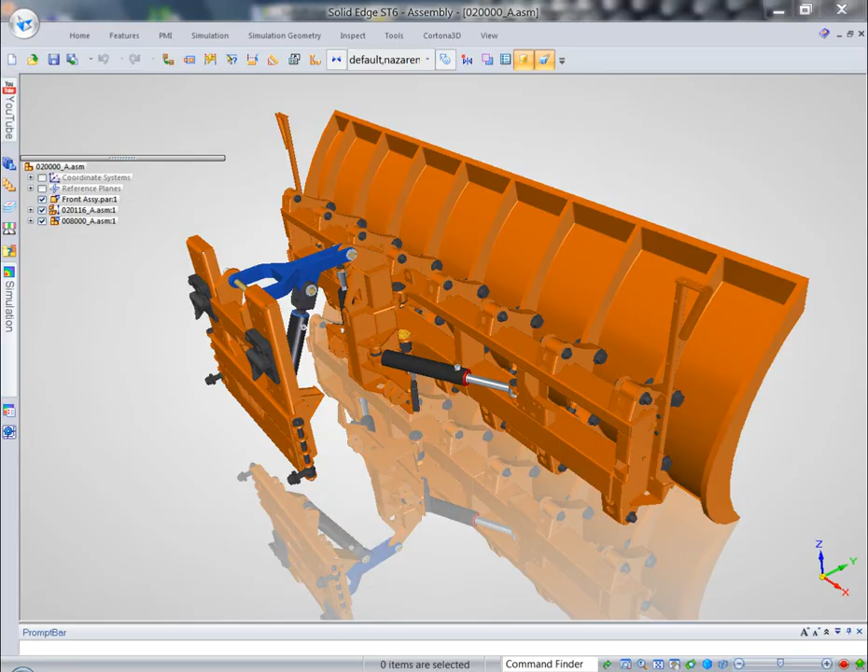We're going to be focusing on the plow assembly that is being attached with this pivot arm, the blue piece, to a frame on a snow blowing machine. We're concerned if this particular arm will be able to support that weight.

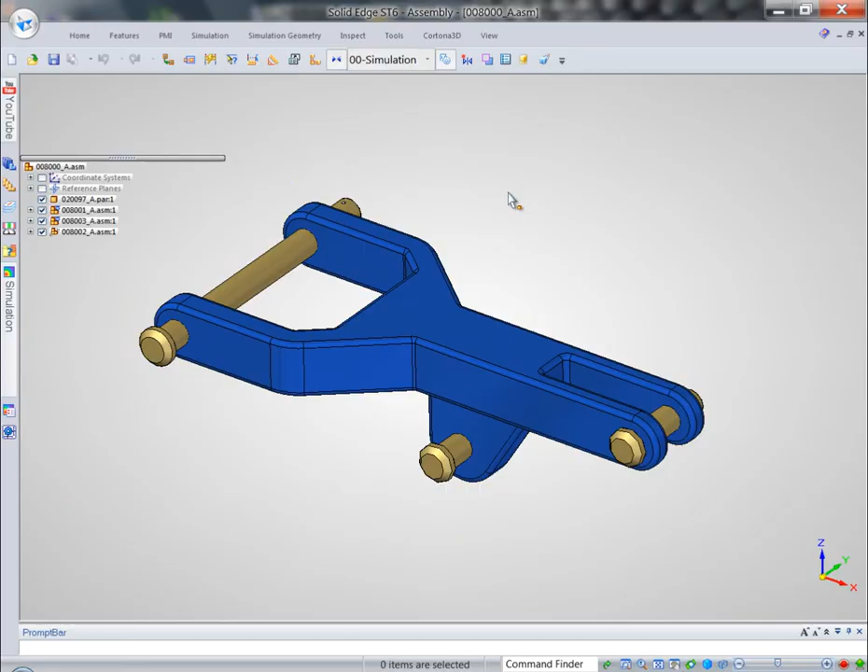Because Solid Edge Simulation is part of the Solid Edge offering, it's a single environment, so we can easily isolate, using display configurations, the required parts for this particular study. To further reduce processing time, we can get rid of irrelevant features on this particular part.

We're talking about these small rounds. We can do that in one single step, as you can see. And then after we've done that, we can just tell the system to use this simplified version within the study.

We're ready to start simulation. Simulation is a very intuitive, user-friendly tool. We can perform different types of studies.

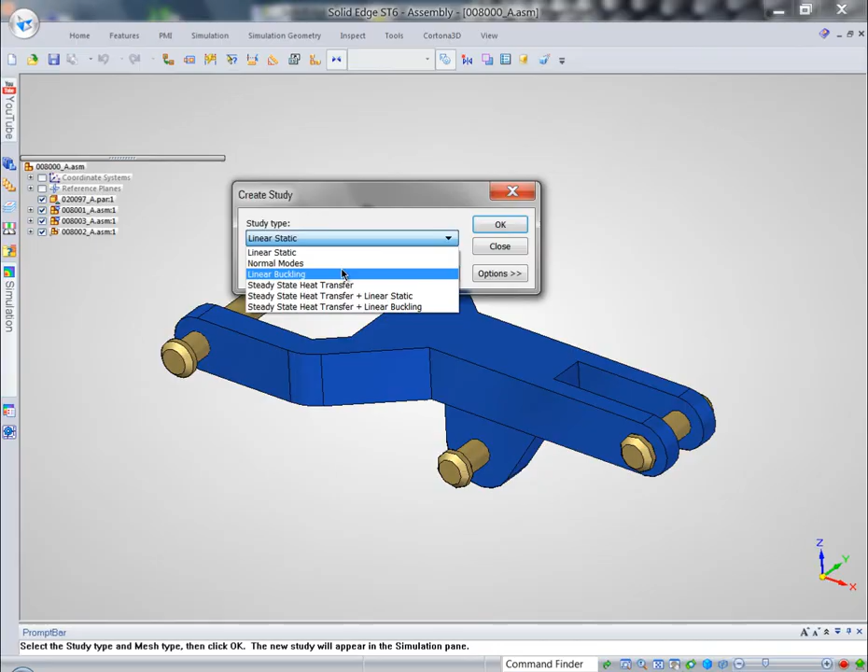We can do linear static, normal modes, linear buckling, as well as steady-state heat transfer, with a combination of all of the above. Now that we've started simulation, we can conveniently see all the elements of our study in Study Navigator. Solid Edge Simulation offers a full complement of boundary conditions as well as loads.

Let's start with applying force. We'll apply a load to the pin that connects the plow to the arm. While we're doing that, you can see that I can conveniently use the same steering wheel I usually use in Solid Edge to manipulate geometry. The same steering wheel is used to define the direction for the force.

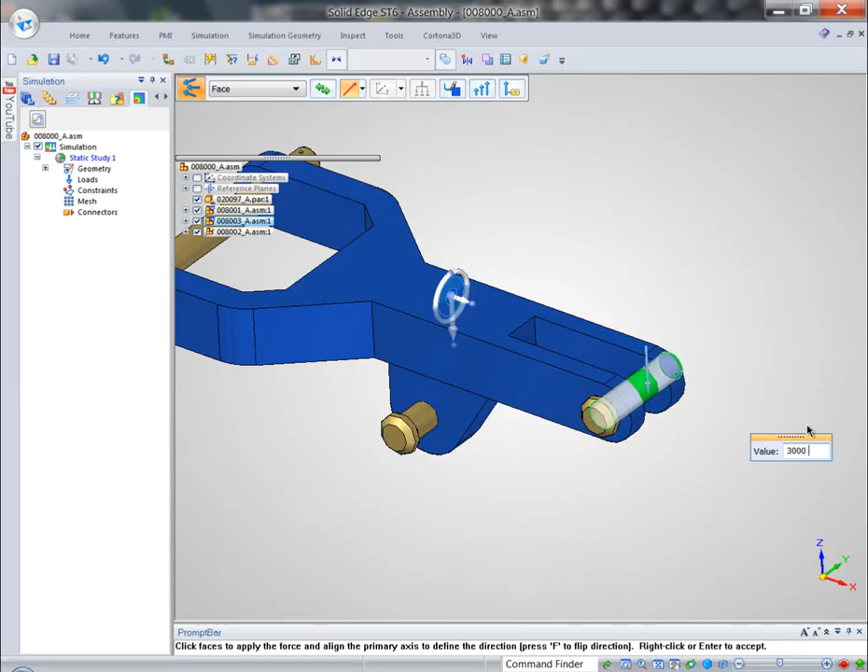Also, Solid Edge Simulation is units neutral, so we can type in pretty much any units and value, and the system will take it. From the constraints panel, we can easily apply fixed constraints to the couple pins that Solid Edge Simulation needs to solve against when processing this study.

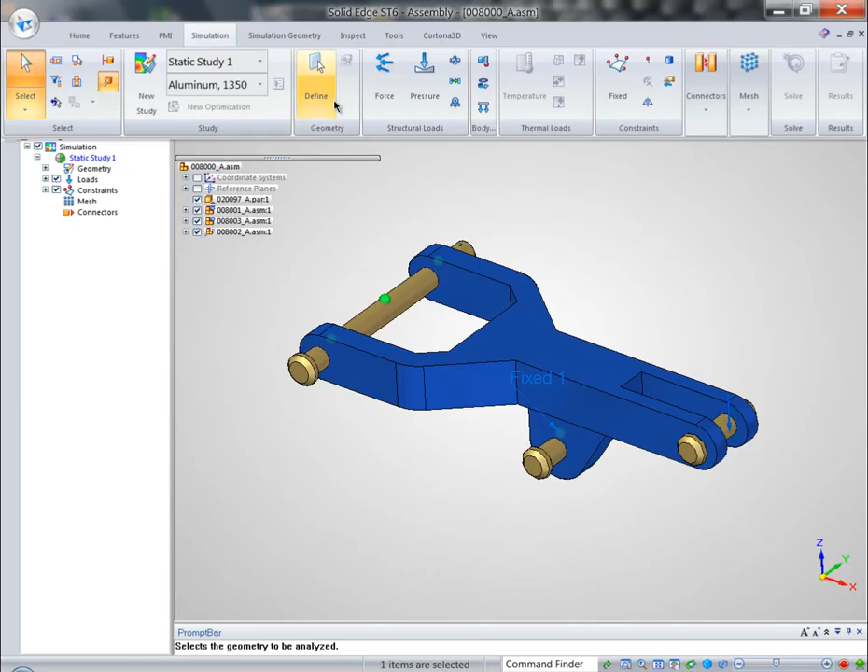And finally, because we're dealing with an assembly, we want to make sure that Solid Edge Simulation understands how all these components interact with each other. That can be accomplished with connectors.

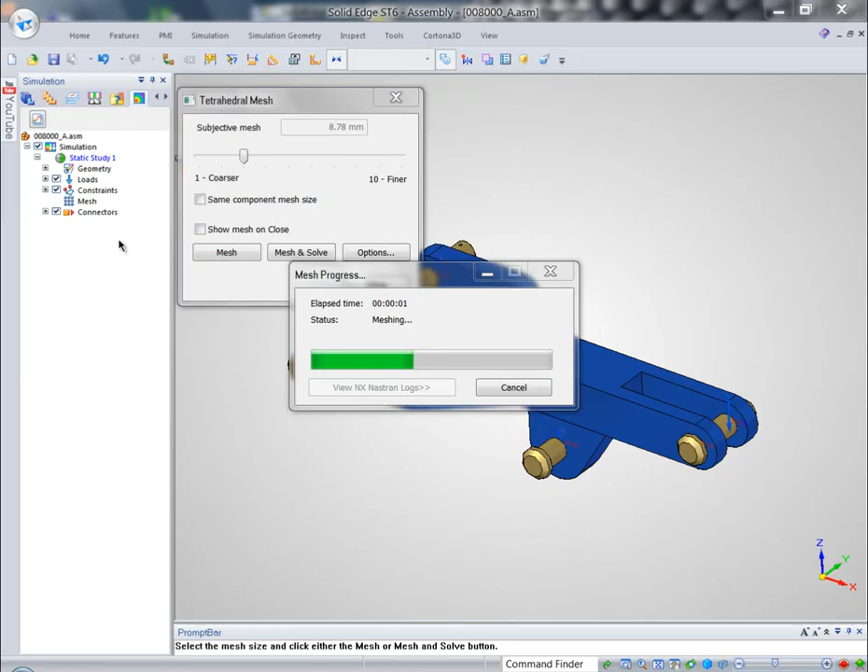Mesh is quite powerful and easy to use as part of this simulation offering. The user can adjust mesh coarseness via the slider. Right now I'm going to go with the default one. You can see that Solid Edge Simulation does a pretty good job assigning denser mesh where required.

When I hit the solve button, all the boundary conditions and loads assigned are taken to NX Nastran, an industry-proven solver, which will process this particular study and bring results back into the post-processing window.

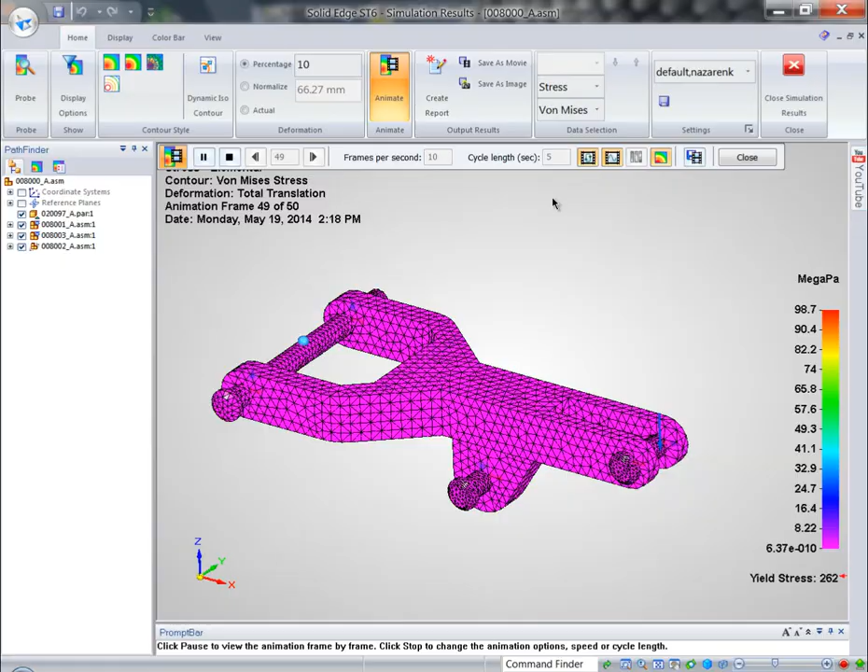We have results popped in, and it's very important for the user to be able to read these analysis results properly. That's why we have such powerful tools in the post-processing window. We can take a look at how it performs under such stress by animating that. We can probe for different stress, and take a look at different representations of this particular model.

But what I'm interested in is factor of safety. And you can see we're in the vicinity of 2.

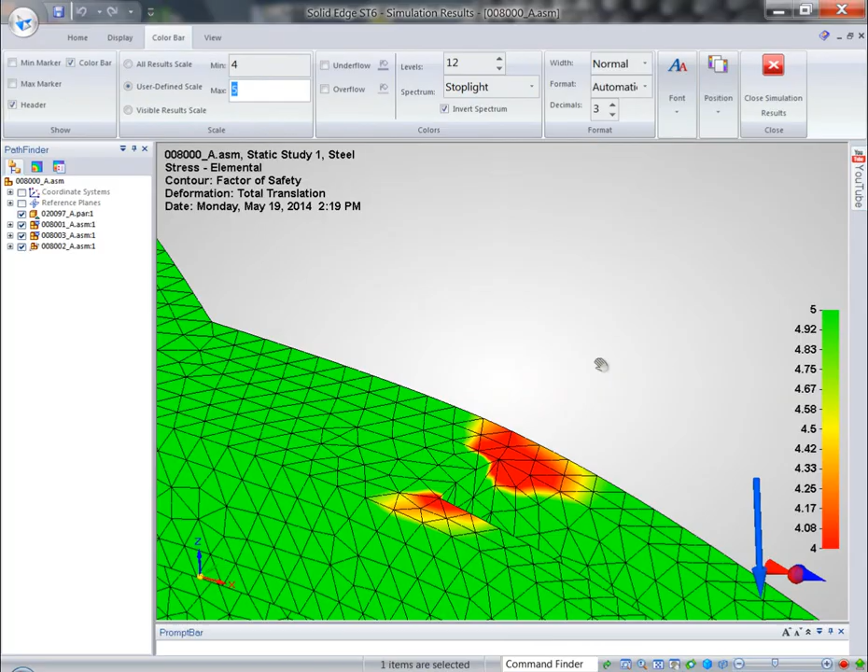So if I further isolate by defining a user-defined scale in a range between 4 and 5, and when we assign that range, we can see that we still have a little bit of a problem that we need to fix. We need to make it a little bit stronger because it's such an important part.

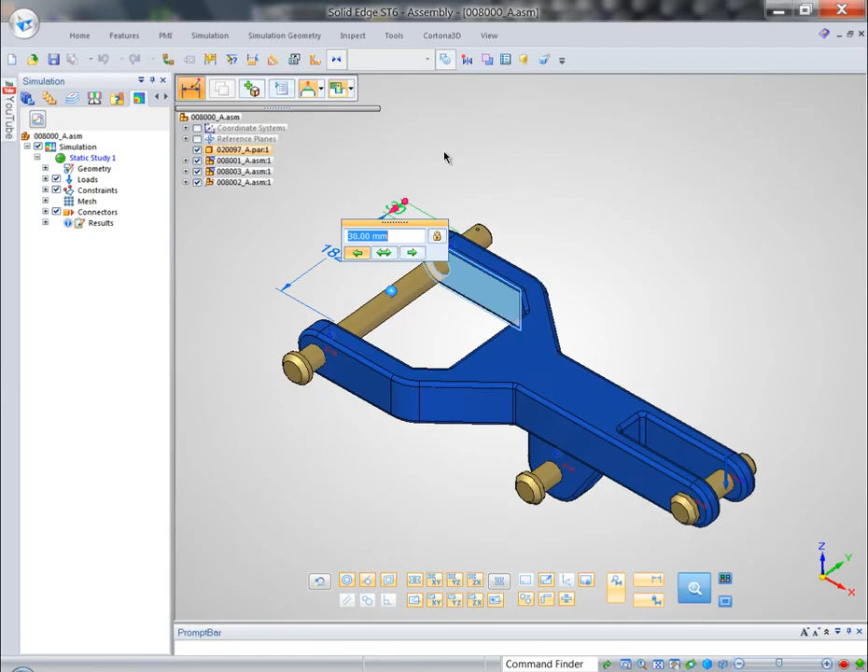And it's quite easy to do because, again, we are in one single integrated environment, Solid Edge Simulation within Solid Edge. Right from the assembly level, I can adjust all the parameters required within the model. Let's say we want to make those ears a little bit thicker. Maybe this cutout doesn't need to be that deep. We can adjust that again in the context of an assembly.

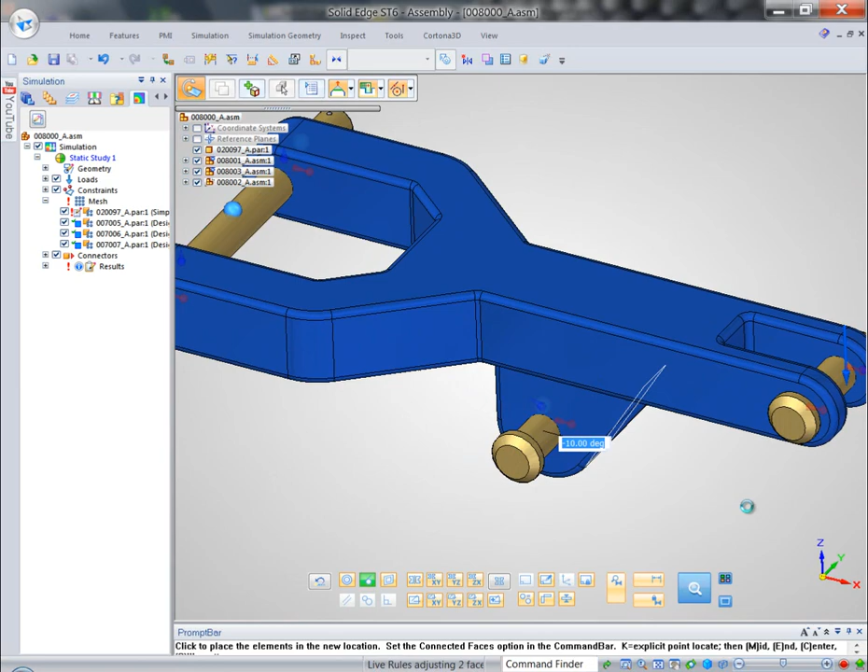And also maybe we want to adjust or reinforce this ear right here, make it slightly thicker. And finally, we want to beef up the part overall, so we want to make it thicker. Total part, make it thicker, maybe by 10 millimeters.

At this point, we're ready to reprocess that, and all that is required is to just hit solve. Solid Edge Simulation knows how to reapply mesh to new geometry, submit all the boundary conditions, even if we change them, to NX Nastran, and bring results back into the post-processing window again.

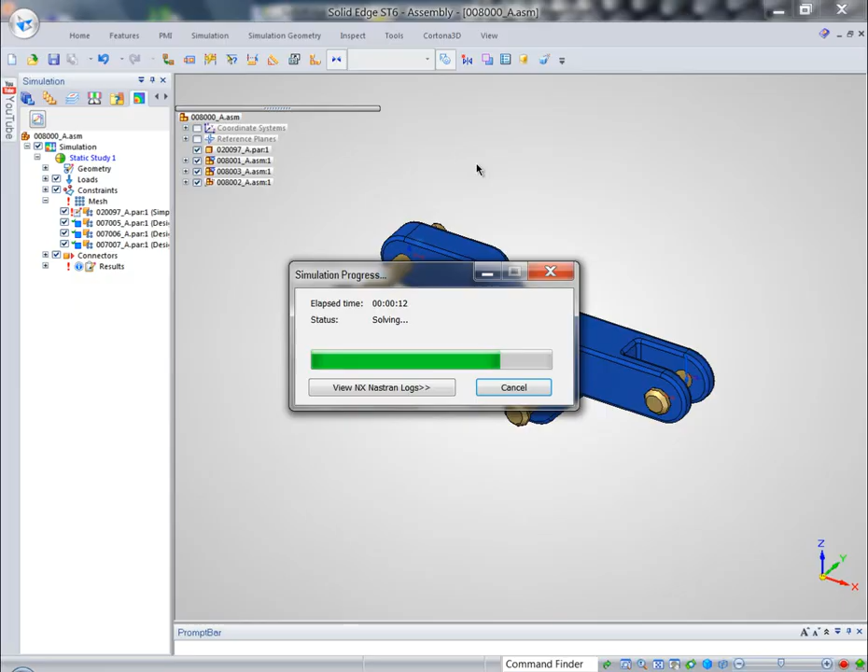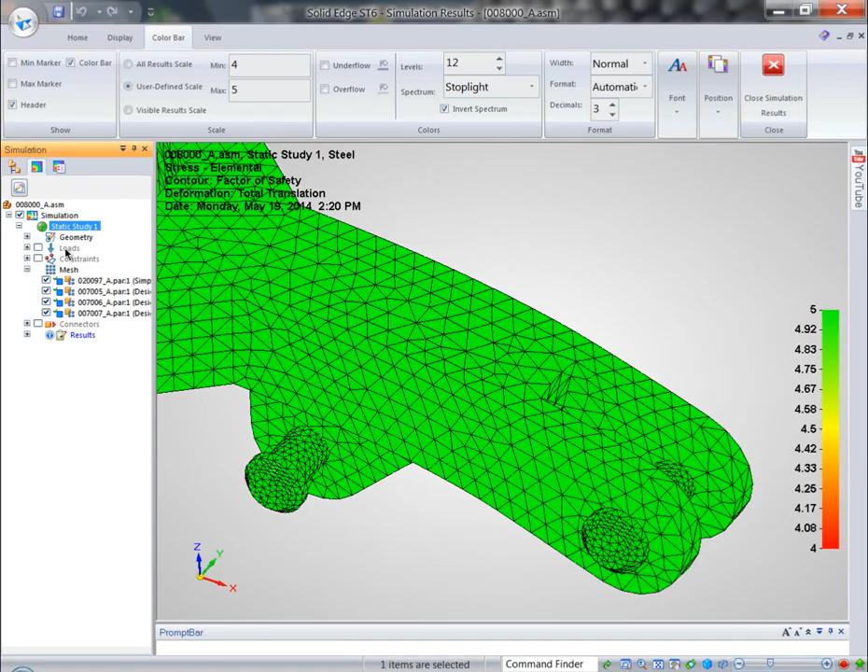Now that we're looking at post-processing results, and in particular, if we're looking at the same factor of safety, if we define it like we said before, between 4 and 5, now we can see that we're pretty much green throughout the whole model. So that's the final goal.

So you can see how Solid Edge Simulation can be easily employed by designers to eliminate costly mistakes earlier in the design cycle, without being dependent on outside companies for analysis. That will significantly reduce the time required to finish the project.